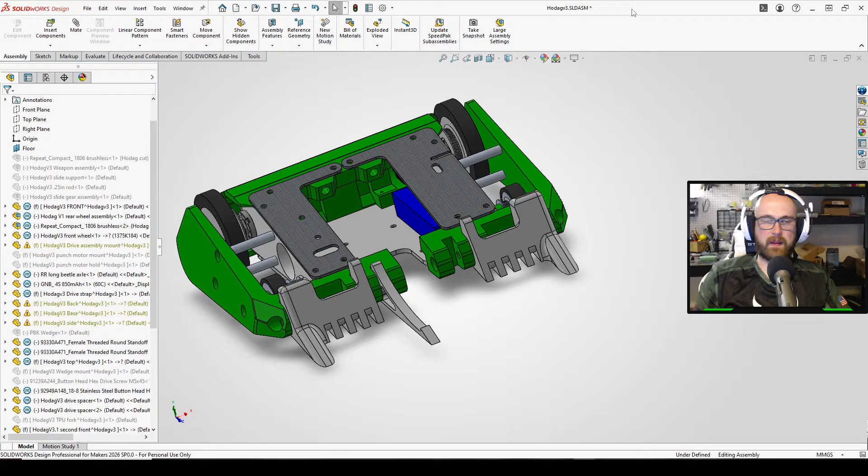But yeah, Jackalope, I have no plans on taking Jackalope anywhere. And I did update the description. I'm surprised you noticed that. That was pretty recent that I updated the description in my channel feed. That was like literally this week. Because...

Things have been a lot slower recently, because I got my robots ready like weeks before. Hodag, I got most of Bigfoot ready like a month ago, and then I got Hodag ready over Christmas.

Originally, basically what I was going to do—if you notice this was already open—my plan is to basically turn Hodag into a regular vert and have a version of that. Originally, I was thinking it was going to be a completely separate robot, but I'm realizing that with what I have planned, the odds are it's going to be a brand new robot.

And I have mixed feelings about that fact because I know everybody loves Hodag the way it is, and so the thing is, we'll have to see how much weight difference. I'll literally end up having to weigh it basically to see where we're at.

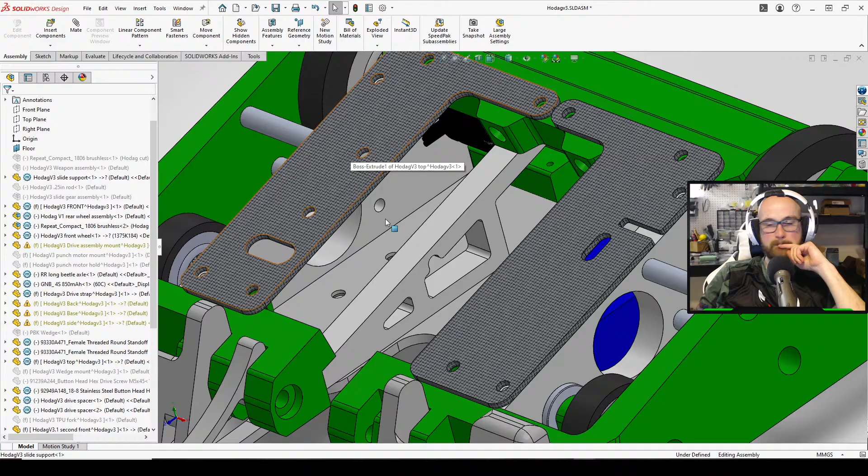Actually, now I'm thinking about it, the slide support was actually... I think I might configure the slide support as opposed to suppressing it. I think I'm gonna configure it because I realized otherwise I'm sort of undoing a bunch of work.

So for those tuning in, what we're doing is we're basically making a configuration—or I'm not sure if it'll end up being a configuration or a new robot. That's going to depend entirely on how much weight is in the weapon assembly. But basically, we're making a regular one. Is that what Razor Leaf is?

I was like, I don't know if this is the same as what Razor Leaf is. I realized this was meant for a much smaller motor, but we can make it work. We can make this fit. I went with this motor because it'll be supported on both sides, and it felt like the right choice.

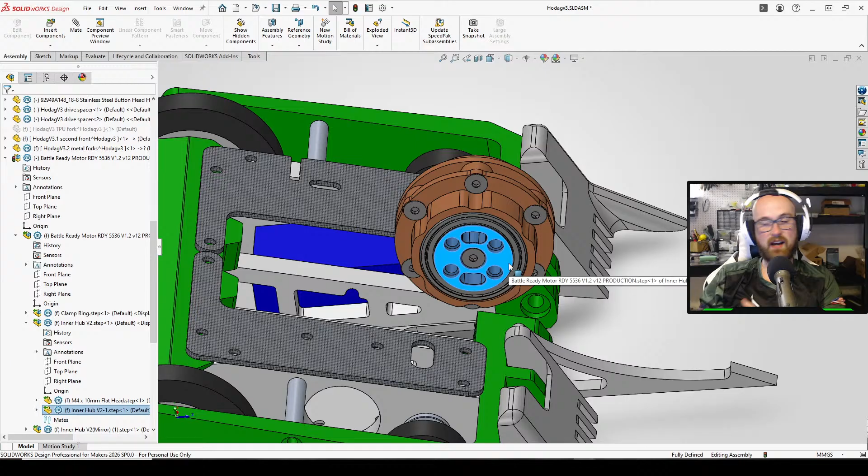I think what I want to do is what we're going to actually do—sorry, I'm thinking to myself as I go. I think we're going to start out by inserting a... so we're going to create a new part and...

We're going to make a virtual disk starting out. That way I know how big it has to be and how big the weapon's gonna end up being.

So we'll call this alt Hodag. We'll call it 3.5, I think that makes sense—I don't know. And then for that we're going to create a subassembly.

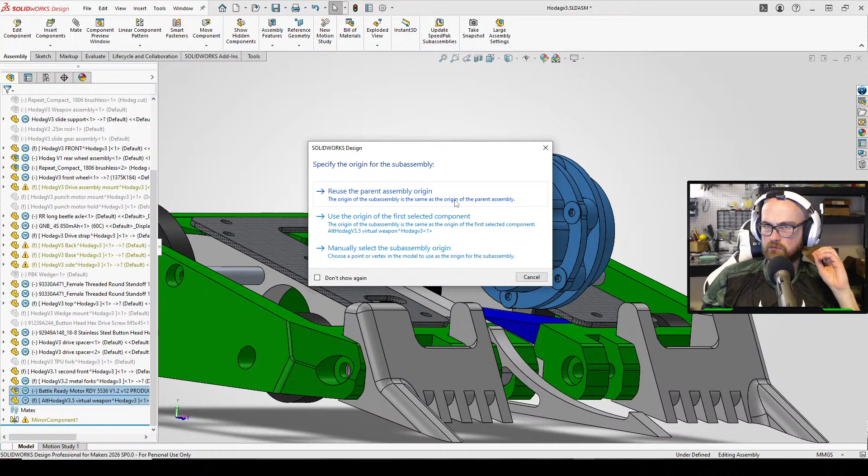Okay, so we're gonna end up editing this part. Actually, we're gonna open the subassembly, I think that might be an easier way to do it. And then we're gonna edit that part.

Basically, this is to give us a—oh yeah, I have to create a sketch plane. We're gonna do pretty much bog standard, as recommended, thickness. I'm gonna start out at—oh, we're gonna start at 4 inches. I don't know why this is millimeters, I'm gonna put this in inches. This feels right for this.

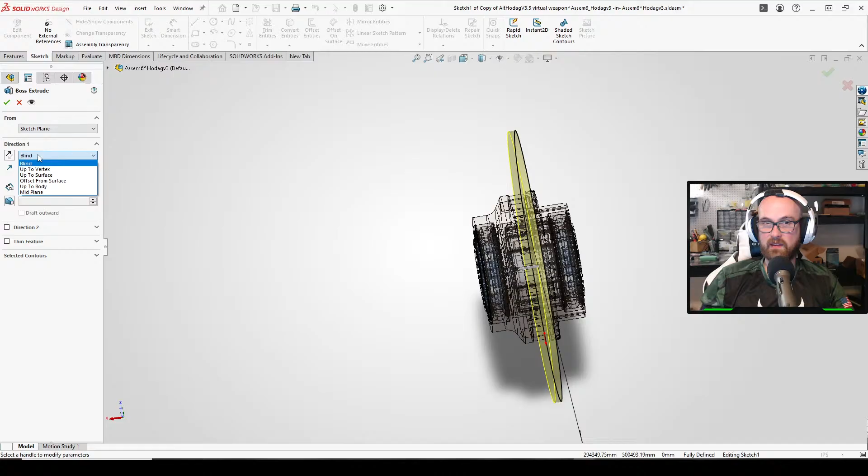Since this is—what do you think is the right name? Because I already had something in mind if it ends up being a new robot. Skunk Ape? I mean, yeah, it is basically the same as—this is basically what I did with Skunk Ape. That is not lost on me. I knew going into this that this was basically doing the same thing. And I mean, it wasn't a terrible idea when I did it then.

Okay, so that's red. This is simulating a 4-inch blade, which is half an inch larger in diameter than current Hodag. And we want to keep this as low to the ground as possible, basically. I don't think we want any of the motor extending past the front of the robot.

I think that's part of what we want to do. We want to keep this—I think we want to keep the center shaft above the plastic part here.

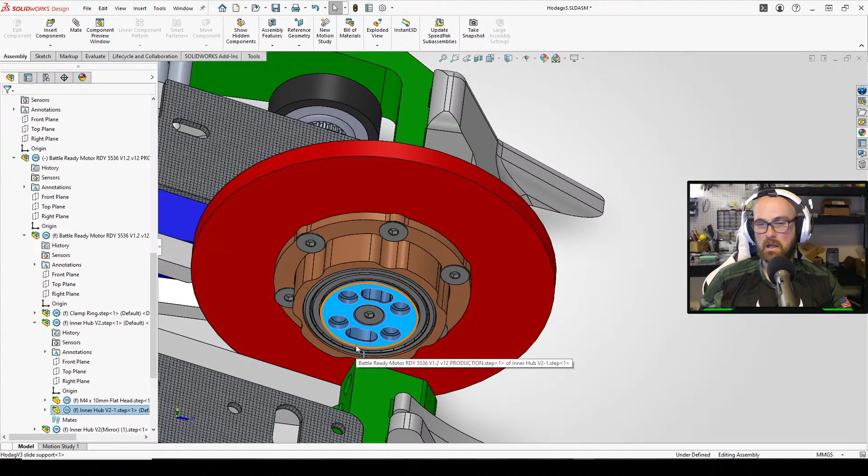While we're at it, what I want to do is configure this. So what we're going to do is create a configure, add a derived configuration. I thought about doing a part from scratch, but I decided on a configuration at the 11th hour, pretty much.

And then what I've got to make sure to do, in this configuration, is suppress this one, because it's mirroring a part, and I'm going to have to mirror the part in the part because it's going to actually have to create a different part. That's why I didn't—because that one is symmetrical, but as you can see, this is not going to be able to just be a flat piece of UHMW. That's not an option.

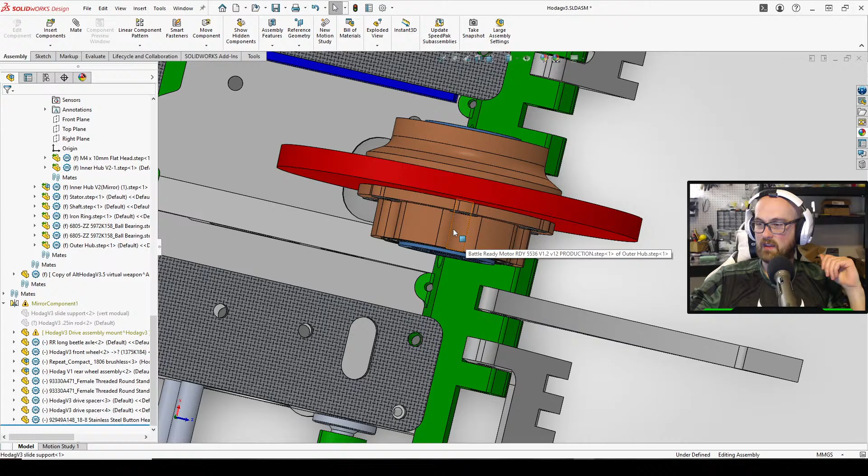Sorry, I'm thinking to myself how I want to do this. I think we're going to create a sketch and create something that puts the axle, I guess we'll call it, where we want it, in the correct position, and then we're going to work from there. Then we're going to finagle things, because I think what I want to do, actually, first off—

I want to do some mates. I want to mate this so it's a little bit closer to where we want it. But we're going to start out with a—wait, width or symmetric? I think I want symmetric. We'll do it the right plane, and then we'll do the sides of this.

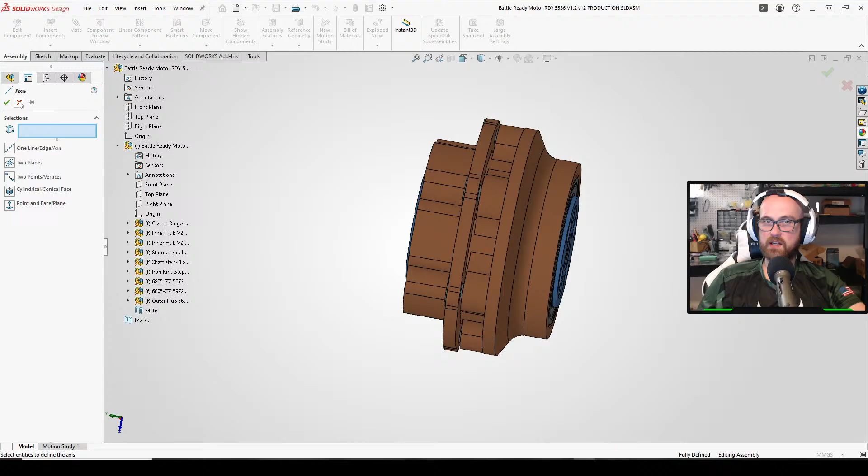Actually, did Seth do this correctly in a way? Or I don't even know if that necessarily matters what Seth did. Nope, it is not—there's not a plane where I want there to be a plane. Actually, we'll create a plane. We're gonna create a reference geometry in this file, since it didn't carry over, even if Seth did one originally. That way, we have a plane that is the center of mass of the weapon.

Because that's better—it's better to do that than the symmetric mate. I'm trying to find rename tree item. There we go.

Oh no, I don't know if that's a good or a bad thing, that this is the motivation for something else.

We're going to do that, and we're going to do this to the right plane of the assembly. Part of me wants to—no, I don't want to. I think I want to avoid having our little assembly centered or dependent on this.

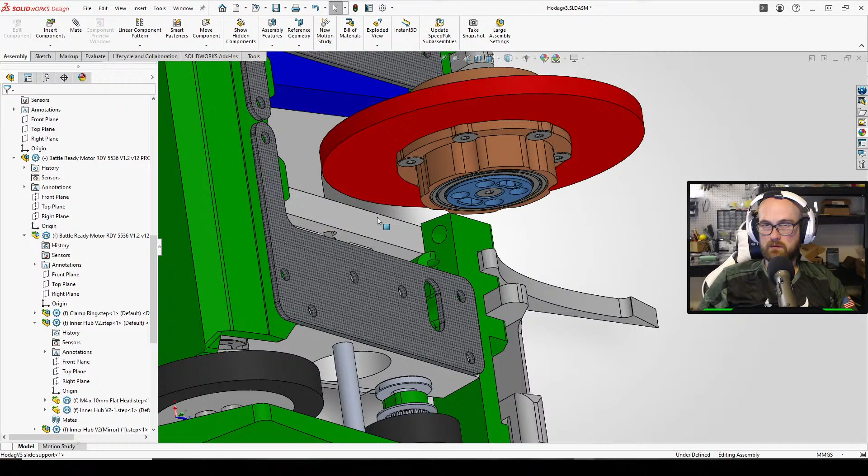Okay, so what we're going to do is edit this, and we're going to basically create a sketch off of it. And I'm going to extrude it out, and then I'm going to cut away what I need to make the weapon fit.

I'm definitely going to end up changing where the holes are, because we're basically going to end up doing something like this. I want this perpendicular to that. Actually, what we're going to do is we're going to do...

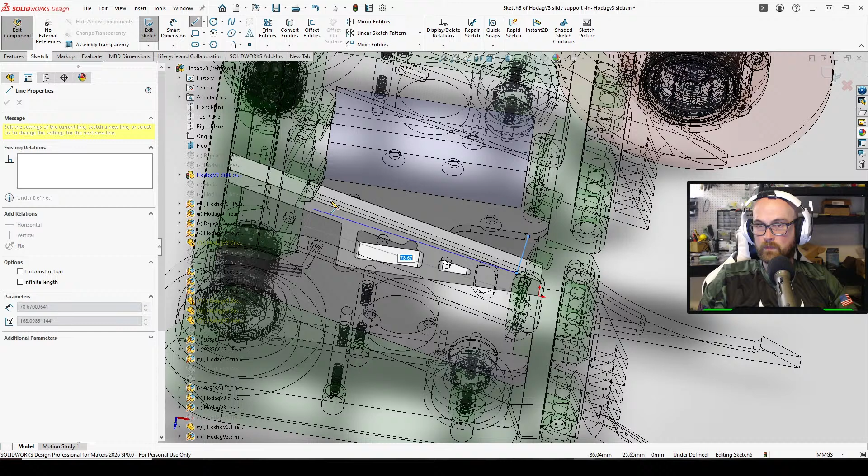I'm actually probably going to end up filling in these holes and creating new ones. Or I'll have it be 3D printed and won't care—one of those two. Because what we're going to do is make sure this is perpendicular to that.

Because this part is basically going to give us—we're going to give them a 1 millimeter gap. I don't think the gap matters. Basically, it's probably going to end up being the height. We're trying to make this the height.

I may end up doing a top, basically somewhere to have it be where the top plate is. I mean, this version of Hodag's already inspired by Pipeline Punch pretty closely.

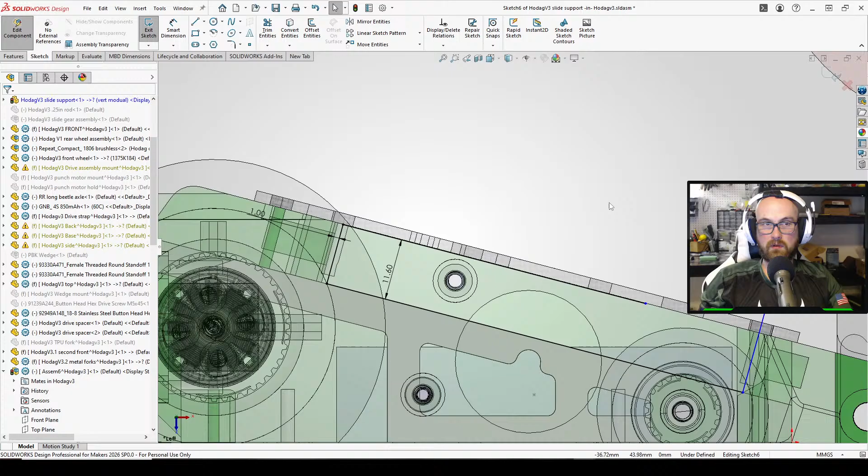Yeah, this is definitely going to be a smaller weapon than Pipeline Punch. It's always going to be a small weapon because Hodag already naturally has a smaller weapon. So there's only going to be so much room, even though this will be a larger weapon. Otherwise, I feel like if it's not a larger weapon, it kind of defeats the purpose. But I think, yeah.

What's funny is even though I'm buying like a $95 hub motor, this is still going to be cheaper than the current version of Hodag. I can guarantee you that. Okay.

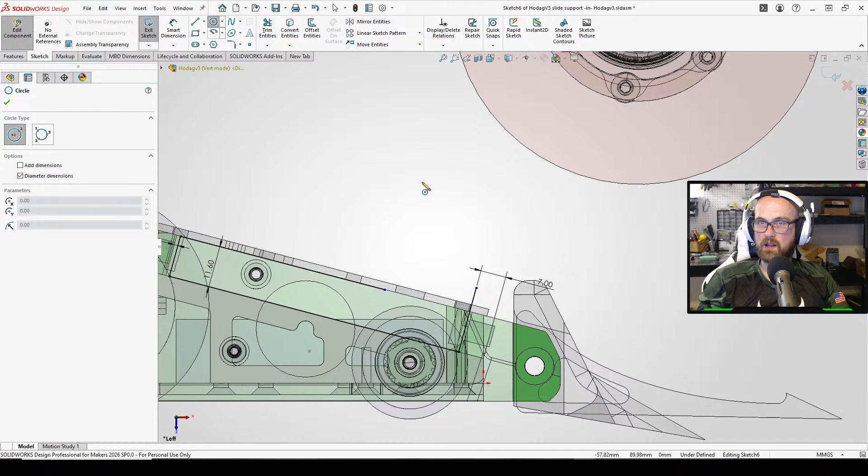So, how do I want to do this? I pretty much want this to be something like that. I'm gonna create a hole, even though I don't think I need a hole there because there's not really a through shaft. I'm gonna be mounting it through this with the screws. I think we're gonna have like a 5mm hole somewhere. The idea being this is where the center of the weapon's gonna be, and I'm gonna use this to mate.

This, please tell me I actually made that... no, it's not gonna be, that's not perpendicular. What are you doing? That's not what I did.

Here we go. Sometimes when I use the mouse shortcuts, when I right click it brings that wheel up. Whenever I hold right click, I can move the mouse to quick select things. I didn't know that—they didn't teach me that in college, I had to learn it after the fact. So that's a little tip for you. I don't think I ever really talked about that, even though I constantly use it.

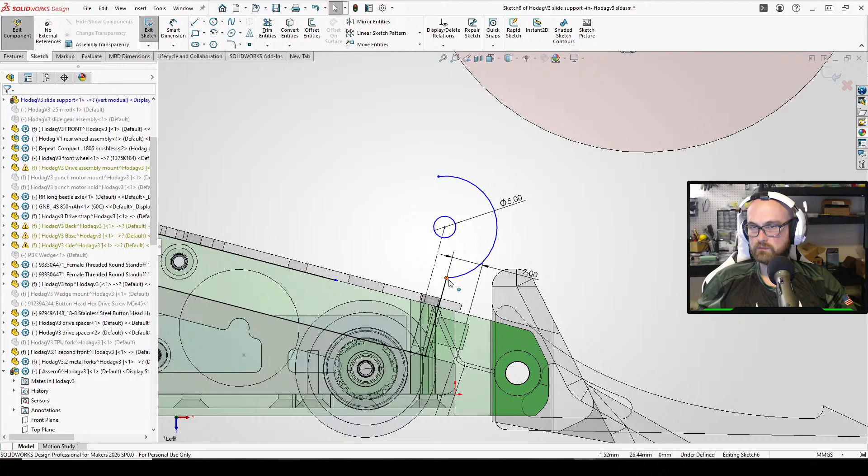I think I'm gonna make this slightly higher than... oh, control, nope, I don't know what I did but I didn't want to do it. We're gonna do that slightly higher than the front.

So let me double check something. I think I want what it's mounting to be just the size of, I think this. That's not what I'm trying to make, right? That's 20, I think, so we're probably gonna do like 27, 28mm.

Actually, we might want to go closer out to the bearing, or closer to the edge of the bearing. So we'll go 30. We'll do a clean 30. Or maybe a dirty 30, however you want to say it, I guess. I don't know what that...

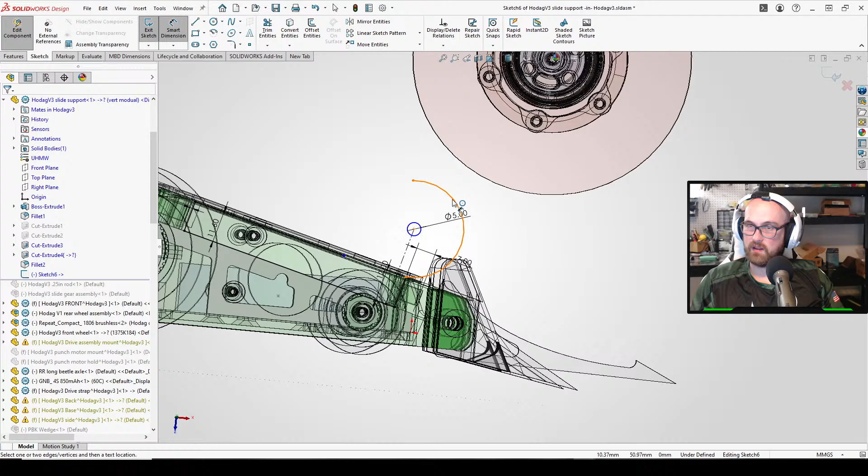It's weird, it looked like I was editing it, but I was not. That means this is going to be 15. That is... ooh, that is not—I was like, wait a minute, that is not how this is going down. This is not going to be the shape of it.

Sorry, I'm thinking. Is... you know, just for shits and giggles. Okay, so one thing we're gonna do, sorry, bit of this, bit of that. Stop trying to—I'm not trying to do that.

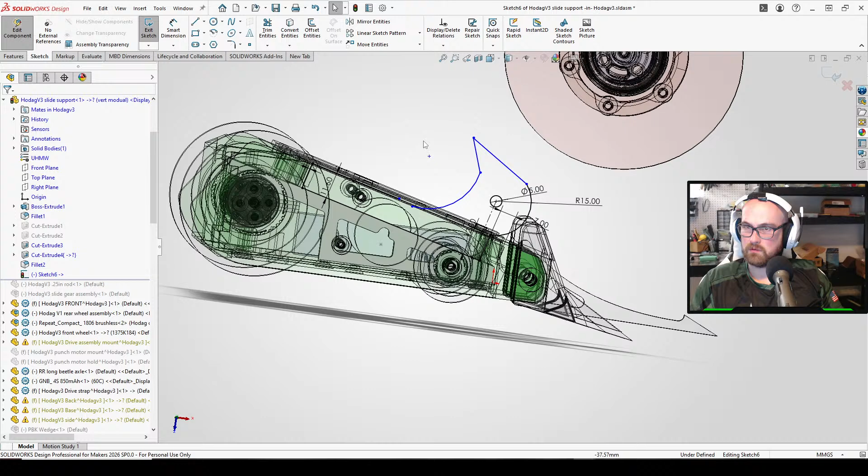And we're gonna mate this to that. Oh, I don't think I mated it to the wrong thing. We're just trying to get some rough sketches currently. This is basically—I still want it to kind of look like Hodag, but also this is gonna be what's gonna keep our weapon from touching the ground when we're inverted.

It's not gonna—I don't, maybe it'll be that. But I obviously am gonna constrain that later, hopefully. Wait, did I not? Am I missing something? Oh, I'm not—oh yeah, I am trying to do up to. Do I not have any con—

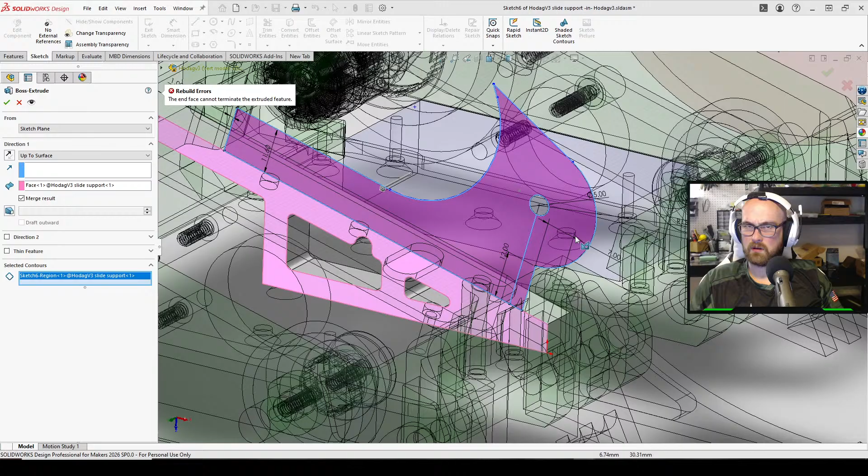Sorry, I needed to select the contour. It's not like I created... wait, I did the wrong surface. Surfaces. Whoops. Up to surface. Sorry, there we go, that should fix it. That looks goofy as hell, but—

Then basically what I want to do is I want to have this. I had a feeling that was going to be too low because, of course it was. Also, we're touching the ground, which is a bit of a problem. Yeah, there's a lot of issues right now. I just needed to get that first little version out.

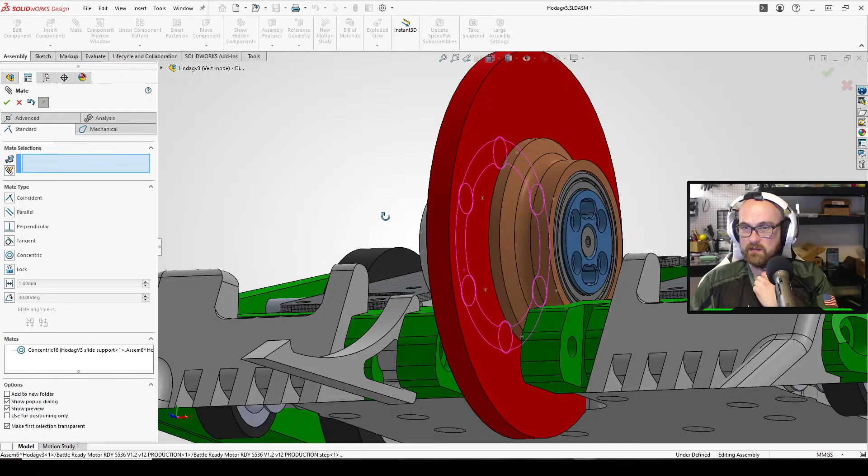Also, the motor is inside, so we need to go just—I think I'm going to go just high enough that the motor is not inside the robot. I think that's how we're going to do it. And the moment that that's not inside the robot, we'll go. Doing robot CAD's a good idea.

Okay, so I wanted to know what our constraints were, that was the goal of that. We need to figure out what our limits are so we can break them. I think actually how I'm going to do this—one, we're going to do that. We're going to do, how about that, 32?

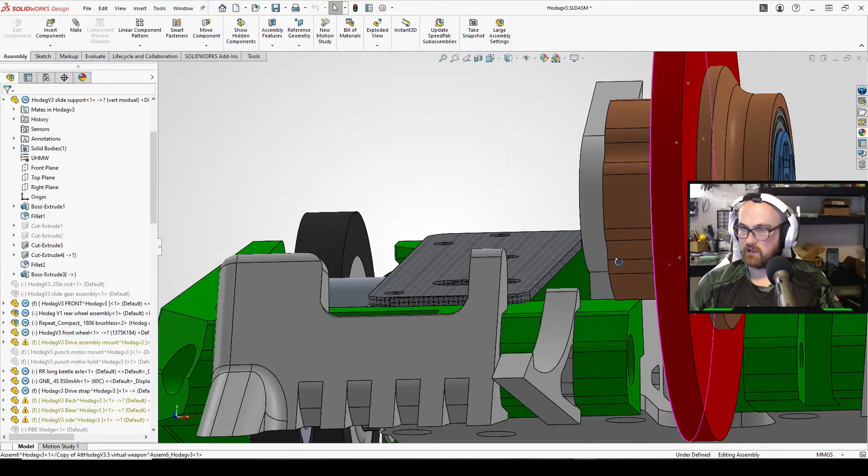A lot higher up than it looks. Oh, it's not actually high up, because we're still inside the robot. Are we like dragging on the ground still? We are still on the ground, but we have to go higher anyway.

Okay, I didn't realize how big 4 millimeters was. Sorry, I spaced out for a second there. I think 36 is going to be where we want to go. Yeah, obviously we're going to have to change some dimensions, but... 36? That almost seems too high.

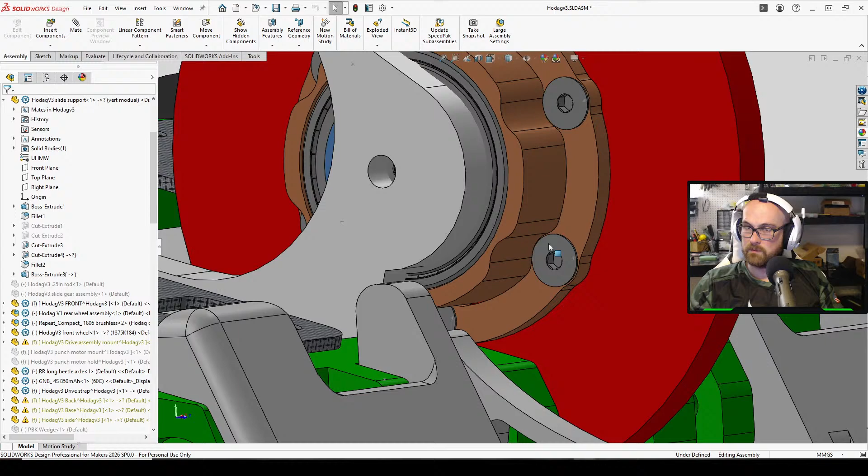I think we can go a little bit lower. 34 maybe? But yeah, I think 4 millimeters was the size we're going with.

Rep. Okay, so we are currently not touching the ground, which is good.

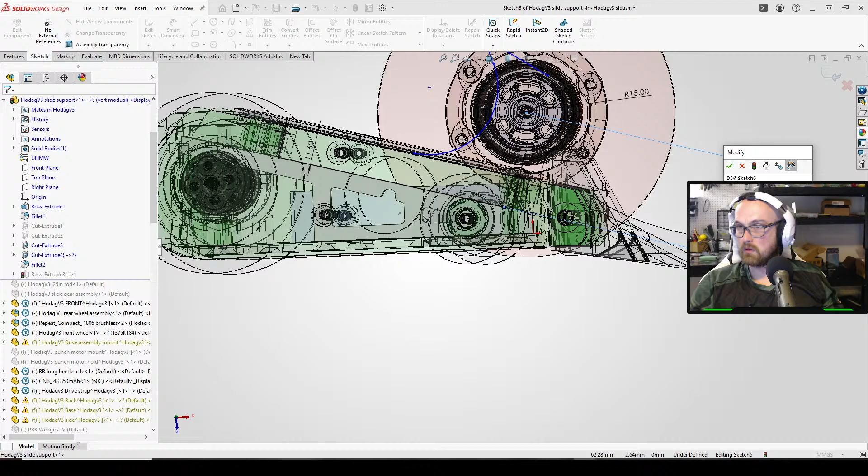Because what is the... Yeah, we're about 2 millimeters above the bottom of the wheels, so maybe we do want to go a little bit higher. Give us an extra millimeter. Okay, that should be good. Now we can worry about other stuff.

That we're going to 54 seems kind of off, because we're gonna probably end up rounding it off, so we're gonna do 55.

And then okay, what am I thinking? How am I gonna constrain this? Is what I'm thinking. I think we're gonna do an angle. That end up looking...

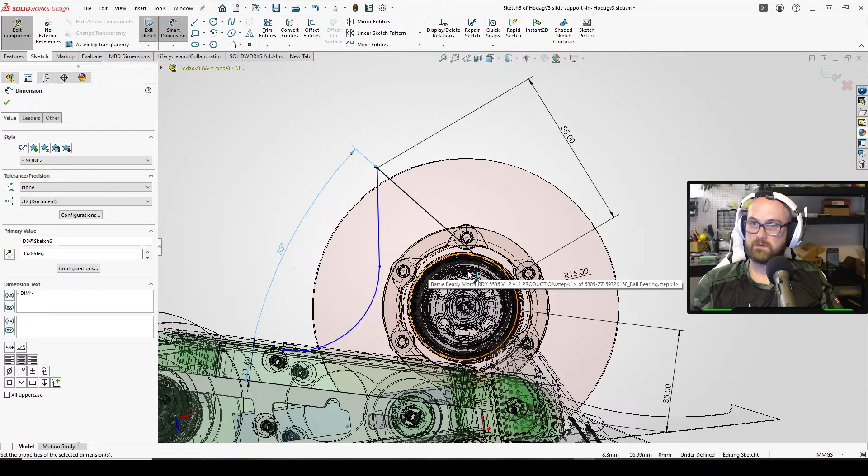Okay, and then I'm trying to think of how we end up constraining that. Nope, I'm not trying. You think I'm trying to do SolidWorks, but that's not what I'm trying to do. Oops, I didn't want to do it that way, even though it's not a terrible way to do it.

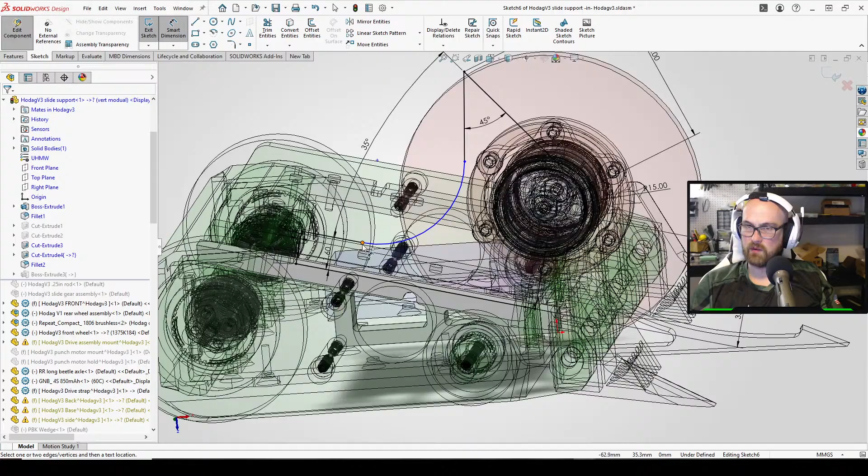What we're gonna do is we're gonna have this. What angle do we want this to be? 45 seems fine. And then I think we want to do it by constraining this, by making that a certain size.

Because I think the goal is that we basically don't see any motor in the profile.

Okay, for now, before we mess with anything else, how does it look? I don't think we're going to have to worry about the weapon touching the ground. And the motor is barely extending outside the front of the robot. So we're not going to... I do plan on having armor there, but it's going to be separate from the mount itself.

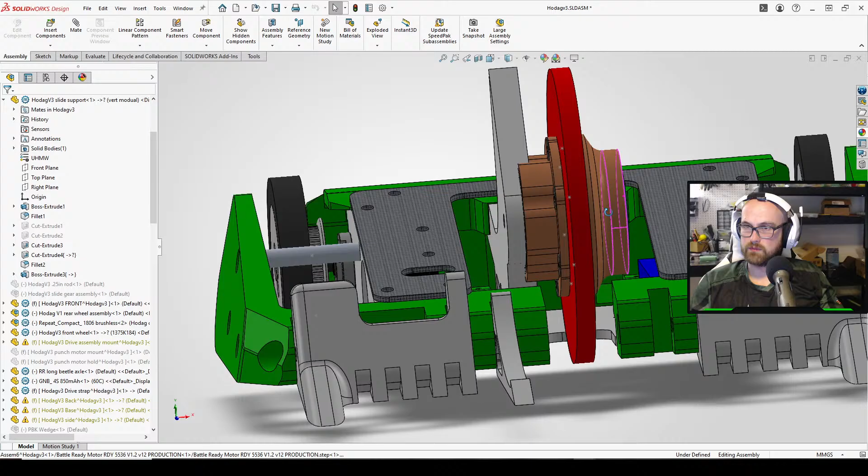Actually, well, sorry. I'm deciding that what I want to do is also fill in this hole since I'm probably going to replace this with a printed part. Or if I do a UHMW part, that I'm going to make new holes. So I'm going to fill in those holes.

So we're just going to convert all these entities. We're basically going to undo the other. Nope, that's not what I want to do. I mean, I guess we could do it that way. It's not exactly elegant, but I think it would actually work if I just did that whole face.

Actually, no, it wouldn't. That's not actually what I want to do. Because I realize there's holes that I don't want to fill in. We'll just do it this way.

Basically, yeah, that way we have a different way to control the size of that. Oh yeah, I have to change the thing to actually select contours.

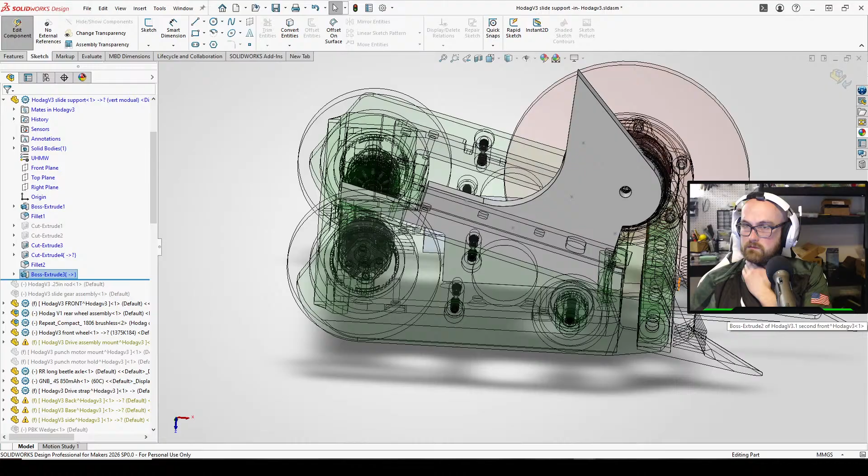Okay, so what's our hole pattern? Whatever. Shut up. Shut up.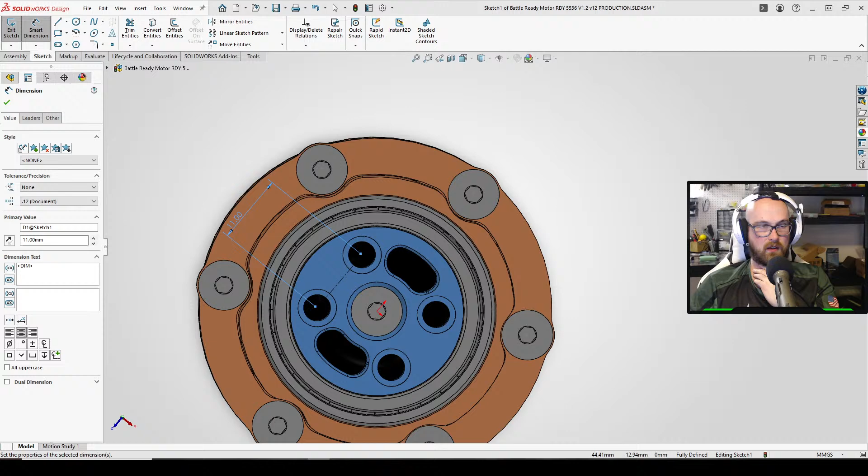Because this is a weird hole pattern. Yeah, I think yeah, because anything else doesn't make any sense. So we got 11. Eleven by 15, it looks like, is the hole pattern we're working with.

Oops, sorry, I did not mean to hit the microphone with the pen. Okay, so that's what we're doing. That's what we're working with.

Get out of the way. And then we're gonna add those holes. We're actually gonna just do it to the sketch we're already working with. No, actually, we're gonna add new holes because that's kind of pissing me off.

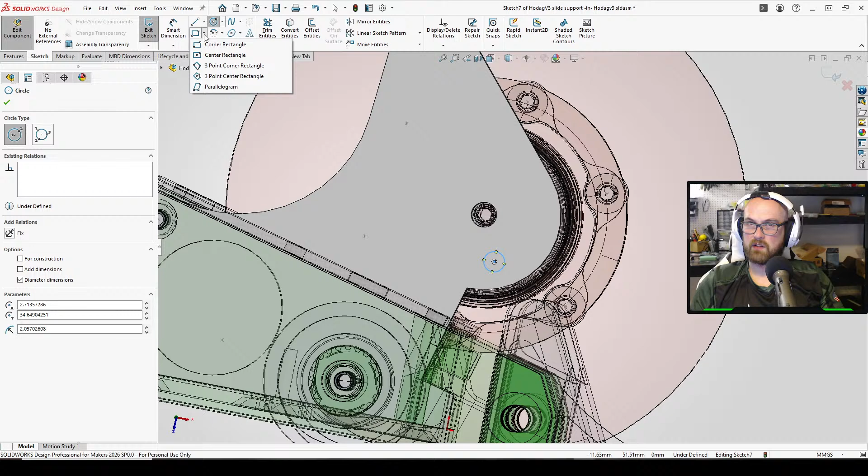Actually, here's what we're gonna do. We're gonna actually do... We're gonna make this for construction. Go that way. We have. Do 11, I guess.

Actually, I'm not gonna make these not vertical or horizontal or any of that. We're gonna rotate these a bit.

Okay, we want to... okay, we do still want them to be perpendicular. Okay, I was like, I at least want it a square still. I just don't need it to be.

Okay, and then we're gonna make these equal, and they are 5 millimeters. So we're gonna use 5 millimeter screws. We're gonna do 4 there, and then we're gonna do whatever creates the most room for us.

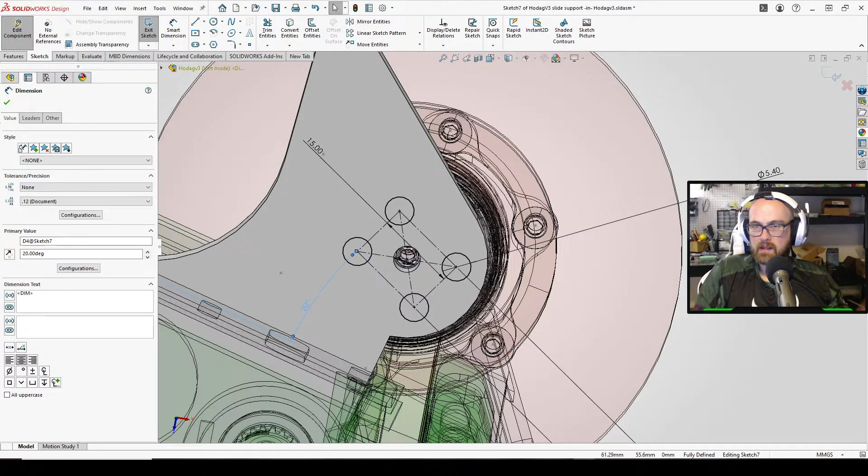I am gonna end up needing a... I'm gonna probably put an aluminum plate right underneath it.

Actually, while I'm in the sketch, I'm going to create a hole that is a certain distance from this. That way, we have something that we can use as a guide for the pin.

Hodag at home. I guess you could call this Hodag at home.

I don't know why I did that. I meant to do 1/4 inch.

I want to do that, and then because I want, we're gonna make me a center line. Put that there. Make it coincident. Is that not working the way I think it will? Oh, I guess.

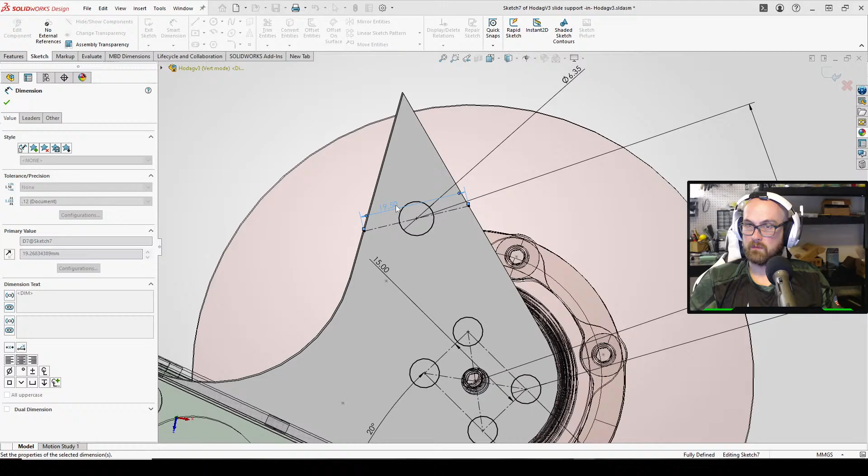I was trying to think, do I have control over the length of this? I didn't feel like trying to find the minimum function. Wait, is there a... I'll worry about that later.

Okay, so that creates holes for our mounting and for that. With that, we're going to cut through all, and then we want to make room for our weapon motor.

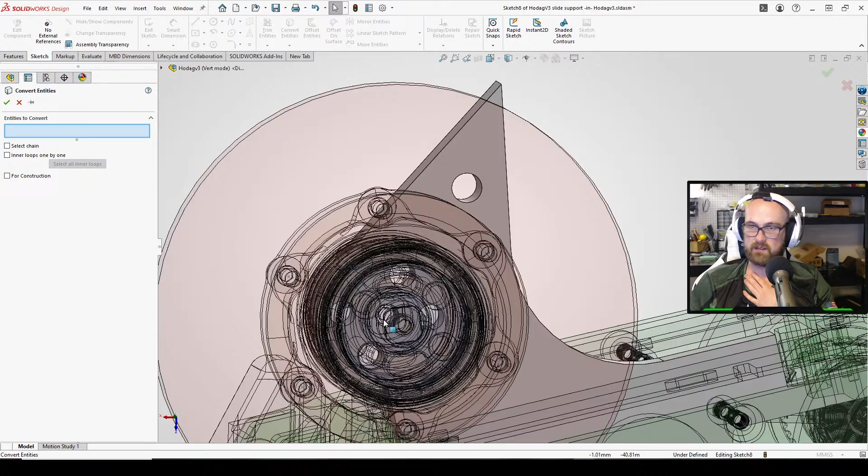The thing is, I feel like if somebody was trying to create Hodag, they would not probably make it just a regular vert. Actually, before I do the cut - sorry, I did not mean to burp in your ear - I want to do some sort of chamfer here.

Actually, I want to make it bigger, because we basically want this chamfer to go all the way down, all the way up. What the hell? Oh, I think we're getting so big that it's... okay.

How's that look? That makes it look a little bit sturdier.

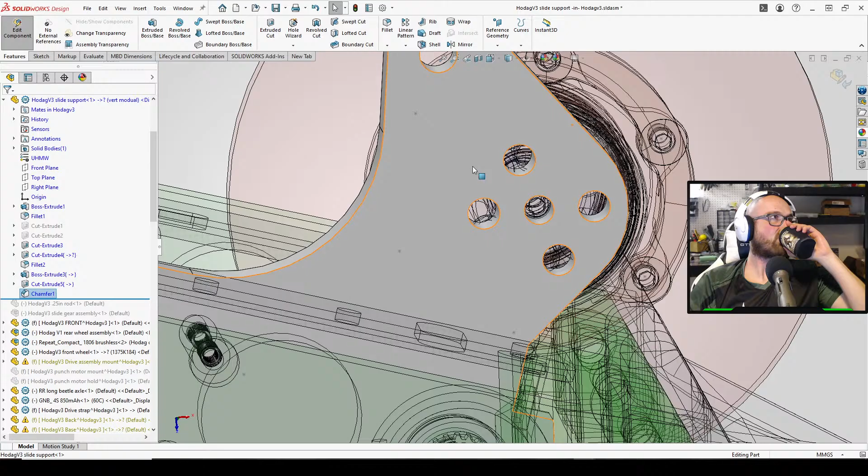Okay, now we want to cut, and from here convert. And then I think we're going to say fuck it, and we're going to do an arc. Arc from here. Whoop, oh my god, I hate it when it wants to make an arc from the opposite direction.

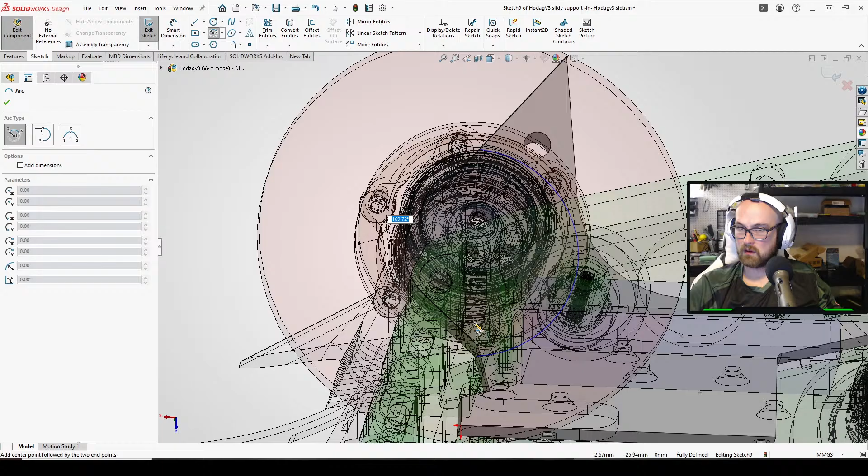Oh, we definitely want to save. Yeah, save. Sorry, we haven't saved in a while and I wanted to save.

Oh, okay, we want to go a little bit further than that motor - 23, since we're really close. Yeah, that should give it some breathing room.

Then we can do some trimming from there. We got a trim. Oh yes. Oh my god, perfect.

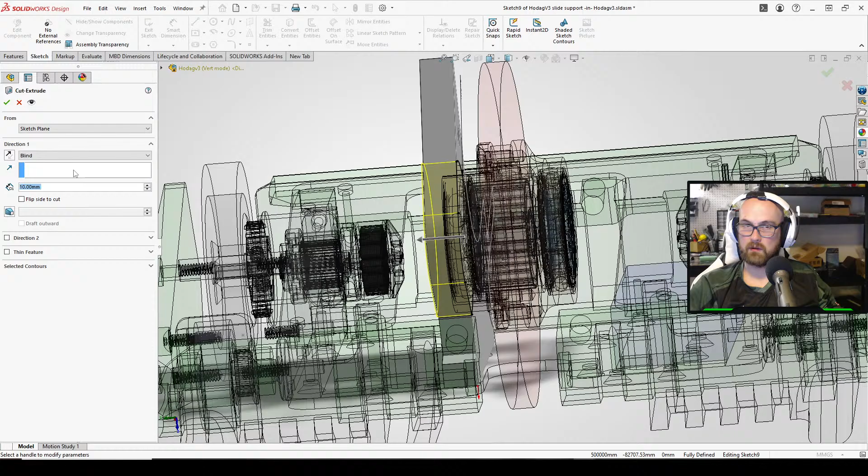I think my math said 4.5. Is that correct? It's pretty goddamn close. I don't think there's something I didn't account for. I might not have accounted for everything. Actually, no, wait.

No, the actual motor itself, the inside of it - I was trying to, I have to see if there's like actual... Oh yeah, I didn't quite - not quite.

Because I think I made my estimate based off of nominal sizes, and I did not allow for that. Yeah, that'll be close - that's much closer at least. Gets pulled in a little bit. Balancing should sort it out, you know.

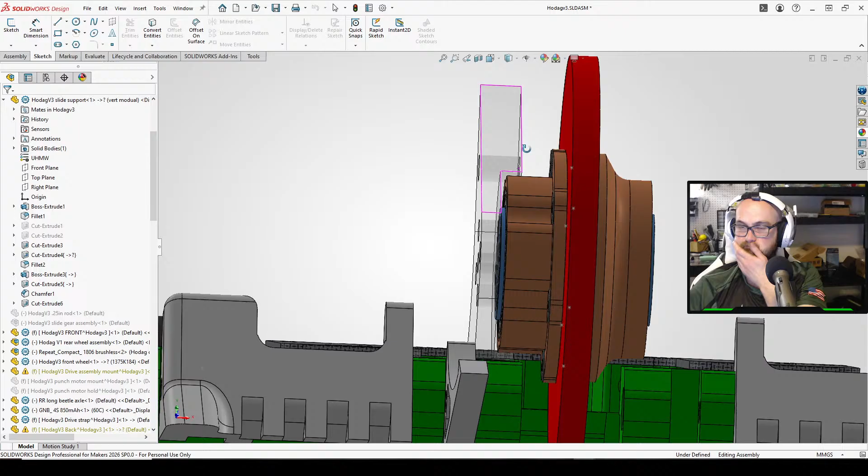I'm debating if this needs more space. That feels entirely too tight. Said no one ever.

4. Is that gonna break it? Kinda.

Damn it. Because what I'm trying to do is make it go all the way to the edge, because otherwise we're going to have a weird little nub. I don't want a weird little nub.

I have to trim this. It's going to get angry with me. We go to this. Come on, stop playing with my heart.

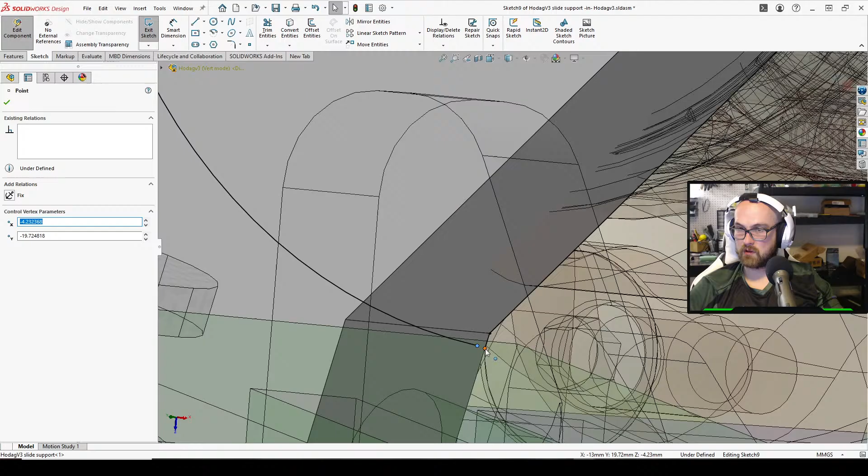Oh, that - there, that way we do that. That way we don't get some goofiness.

I think an extra millimeter of clearance will prevent it from flexing into itself. Although I probably will add fillets - oh, we'll do fillets last. Wait till the end to do fillets. Don't want to get ahead of myself.

Although actually I think I'm done with that part. I was like, does it match up? Okay, it matches up. Just got to do a discount double check.

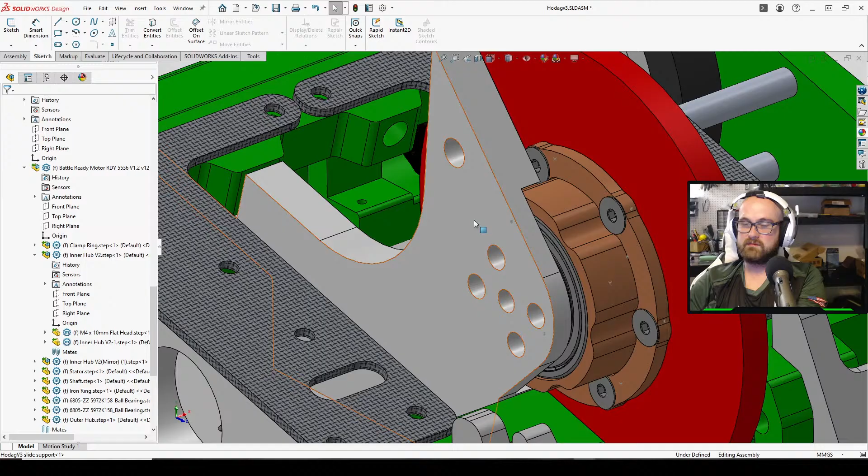Do I modify the top plates? That's the question - do I create new top plates? Because if I want to run it as Hodag, we want to avoid changing the top plates. If we don't want to run it as Hodag, we definitely want to change the top, because I think we want to mount this assembly in the middle to the rest of the robot through the top.

I'm double checking that I like this weapon size, cause that weapon size is big. 4 inches is enough in this case. I don't know about every case if 4 inches is enough - I can't vouch for it in every situation.

We can definitely go bigger on this part because I think we want a little bit more material there, even though it's not going to be what's...

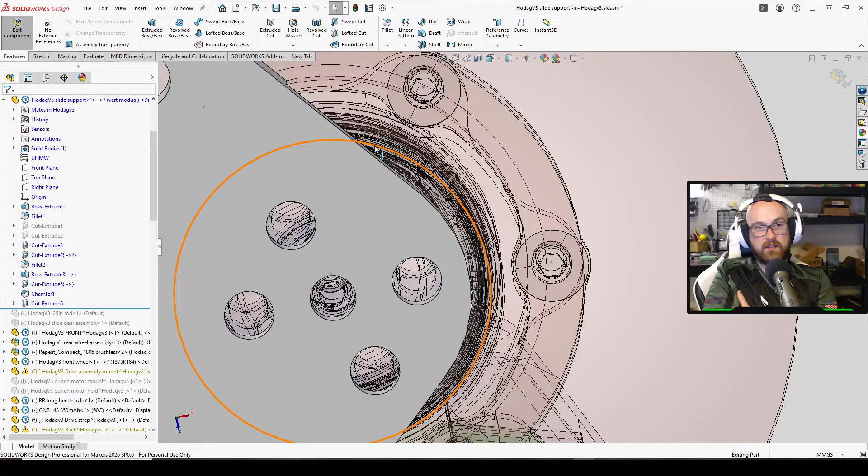15-kilogram 4-wheel drive - I don't know much about robots once you get to 15 kilograms. I am not the person to ask. The biggest robot I've made is a 3-pound robot, so maybe someday I'll make one, but...

Oh, that actually moved over. That should be fun. But yeah, I don't have any recommendations for drive motors - not something I've looked into.

Because I'm trying to think, I don't even talk to that many people that build 30s, since we don't really have many here in the Midwest, or we don't really have events. I know people in the Midwest have stuff that'd be around 15 kilograms.

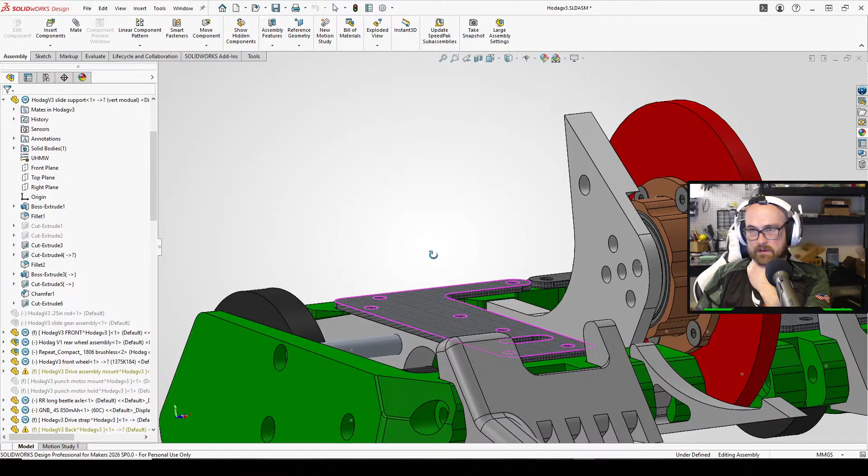Okay, what am I trying to do? Am I satisfied? Yeah, I know.

I don't know what Just Cuz does, but I know Repeat has stuff that's at least designed for 12-pound robots, but yeah, 15 kilos. Pretty much anything I would tell you would be a guess.

Yeah, I know the Magnums, they say they're for 12s and 30s. I can't vouch for what size they're good for. I just know that Repeat sells stuff that says it's for 12s and 30s, but I also haven't really looked into that type of motor.

We may need to make some adjustments.

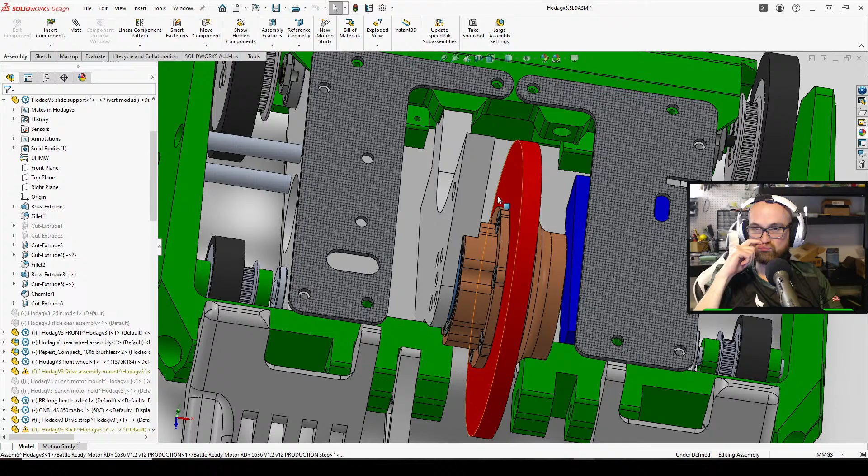And if I ever have to disassemble Hodag, I am definitely measuring the weapon assembly size.

It's far enough for... is there? I'm also looking if there's a way I can bring it further forward. No, I think if I bring that any further forward, we're gonna end up running into issues.

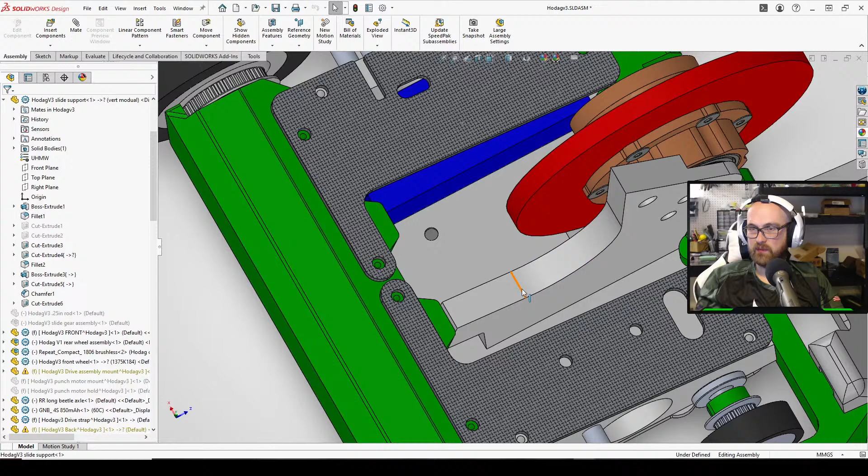I'm thinking it would be spicy if I just used the same top plates. Even though that would just create a hole, because I also feel like I would want to shore up the hole.

We want to create a hole on that plane. Okay, we actually want to have it along the center plane, make sure it's centered.

Do we just want to center it on this? I mean, it doesn't really matter where we put it. I'm just going to make it the same hole size as these ones, I guess.

I don't know, oh, that's not right. Yeah, because these are for M4 screws, so we're probably going to go 3.3 or something.

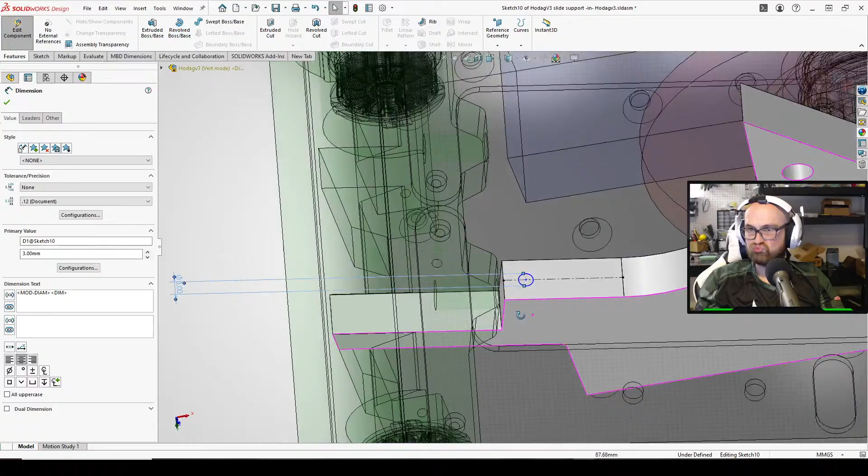50-55s. Vertical circle spinner, I actually haven't made that many vertical spinners. 50-55s, I mean, that definitely seems like enough motor from what I can tell.

That almost sounds like a lot of motor for a 3 pound or 2.5 kilogram. That'd be like, forgetting how big that is... that's about 5 pounds, that's like a weird one. I think that would... no, that sounds like the right amount for a 2.5 kilogram.

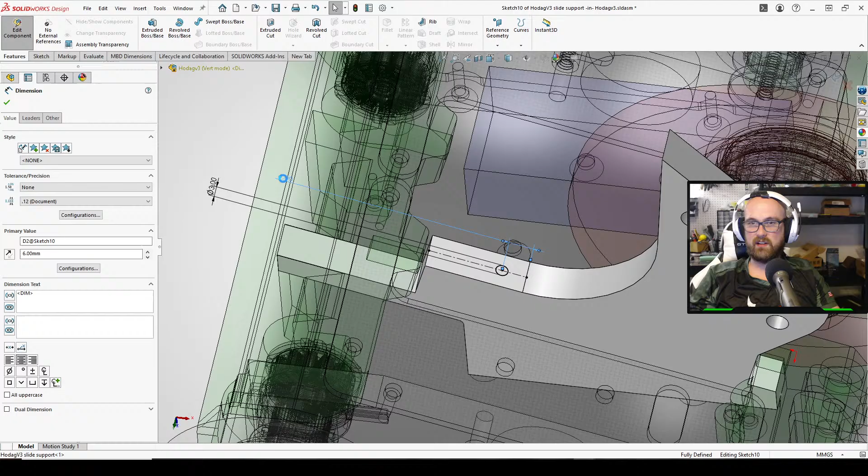Where are you guys running 2.5 kilogram? I guess I don't know what sizes they have outside the U.S. But yeah, because that's bigger than, that's almost like a mantis weight, because that's bigger than a beetle. That's interesting, I've never even seen an event or anything around that size.

Oh yeah, badass definitely has that type of motor.

What did you say, BLDC? BLDC. Yeah, because that seems like the correct size if we're talking bigger than a beetle weight.

And I'm guessing you're probably... yeah, because I also haven't even made that many vertical spinners, to be honest, and the ones I've made have not been exactly successful.

Okay, what am I gonna do? Like I was about to do, okay. Oh, I was gonna add some fillets, so this isn't... because I feel like if I don't, that's entirely too big.

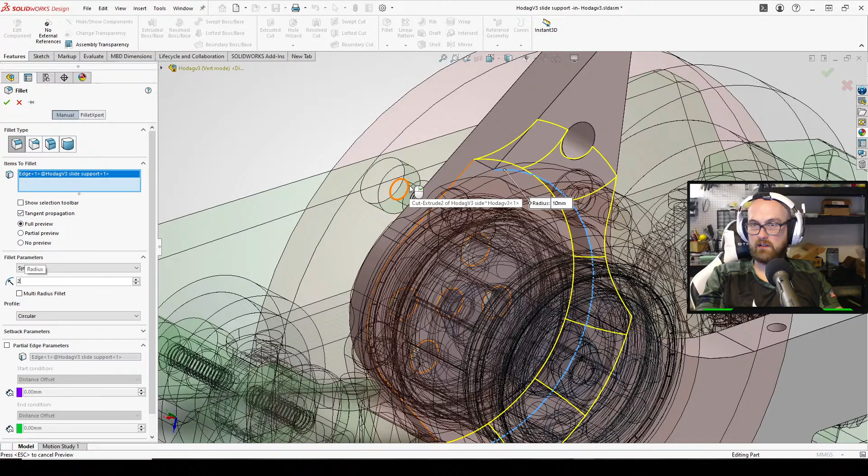Inside and out. Yeah, that should be correct, basically right up to where it's supposed to be. Starts that way. Also, that should make it so it's easier to fit inside of there too, not gonna get stuck on the edges.

Oh, that is not okay, I'm actually gonna need to make that a little bit bigger. Oh, not that one, we went too far, too far in the sketch. Nope, not the feature.

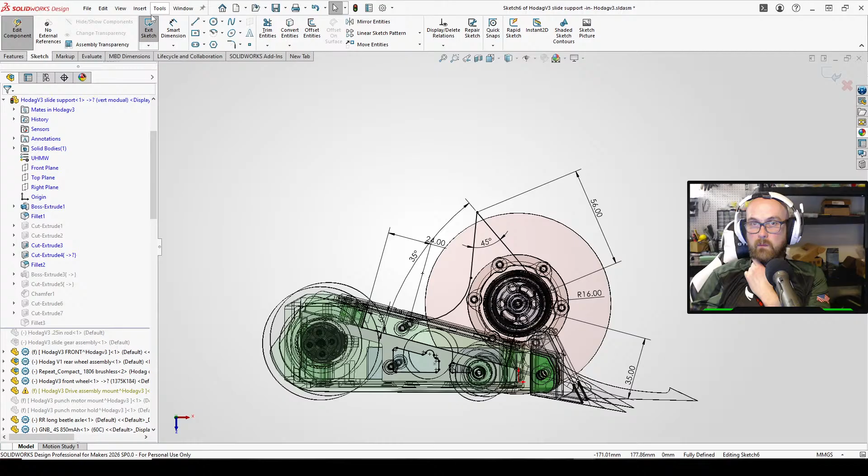Oh yeah, that's definitely not gonna work. So we're gonna change that.

Yeah, but we'll get back to that. I want to finish what I'm doing before I fix the error, because if I don't fix it, it'll come back. Odds are it won't go away.

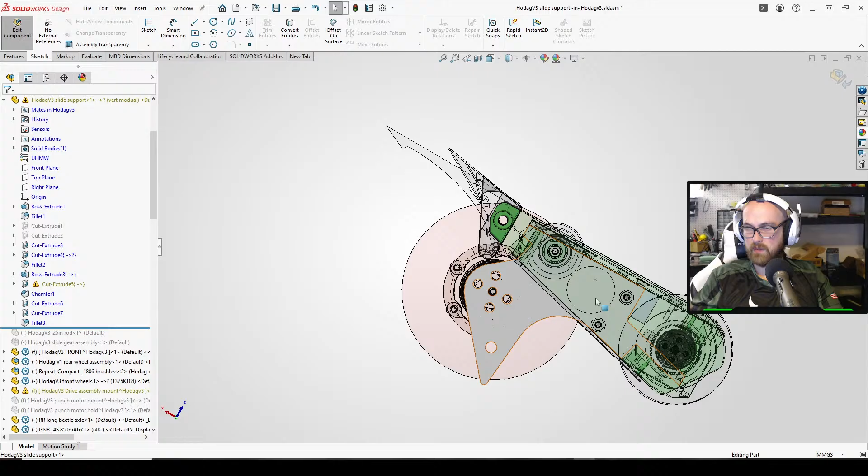Is that the right angle? I'm realizing that's not even gonna work, I think. No, still barely works. Yeah, I think the ear might need to be a little bit higher actually, because currently...

I mean, if I create, I guess I could create a plane. Planes exist.

Yeah, that'll be fine, I think. At that point, I'm more worried about if that's going to be enough material, or if it's just going to end up quickly getting smushed and get stuck upside down. I guess it just won't be able to spin upside down.

Okay, what's your- oh my God, you hate me. What? Okay, now you're just lying to me. You're just making shit up. SolidWorks, why are you making stuff up?

Oh, it's because that dimension broke everything. Okay.

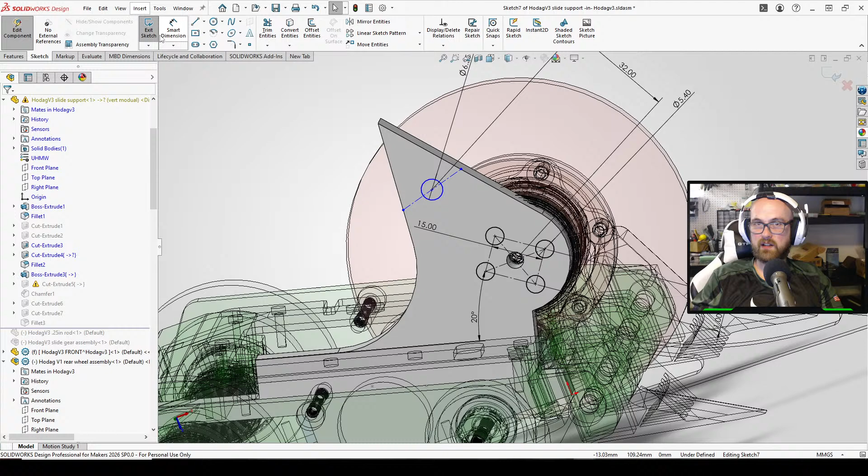We're not even gonna constrain that because- actually, wait a minute, I know what to do. I know what I meant to do. I know what'll do it. Sorry, I thought if I do this, this, make this for construction, make this line. Actually, there's an easier way I could have done it. I could have done a line straight to it, made it perpendicular, whatever. Good enough.

Mission accomplished.

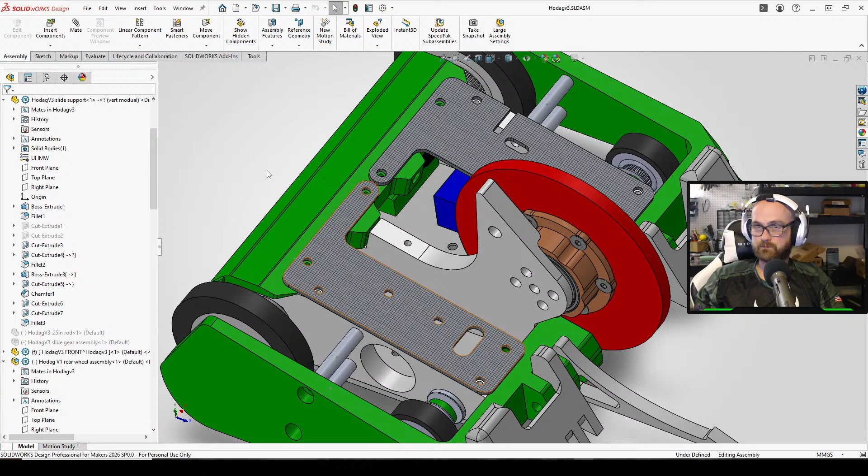Okay, we're gonna add a- we're gonna call this Alt Hodag. Alt Hodag 3.5, and this will be the weapon armor.

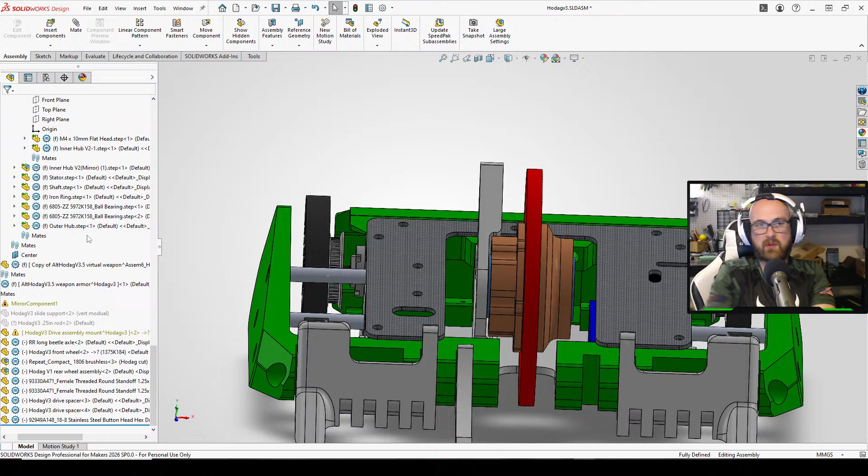Basically, I'm gonna create a TPU shroud. What type of weapon is it? Oh, you're asking him? Yeah, that is probably kind of important. Like if it's a drum, I guess- I think he said disc. Circles, yeah. Diameter will matter, because some motors do not even get you the kV that's good for your diameter.

I also don't even know what sort of battery you would use in like a 2.5 kilogram. But okay, what was I doing? Oh yeah, we're gonna design some armor.

So I think we're gonna borrow some holes from our dear old weapon assembly. I think we're actually just literally gonna convert entity. So I think we're literally gonna mount- we're gonna pancake it. It's gonna be the part holding it up and connecting it to the robot, the armor, and then there's gonna be a little plate.

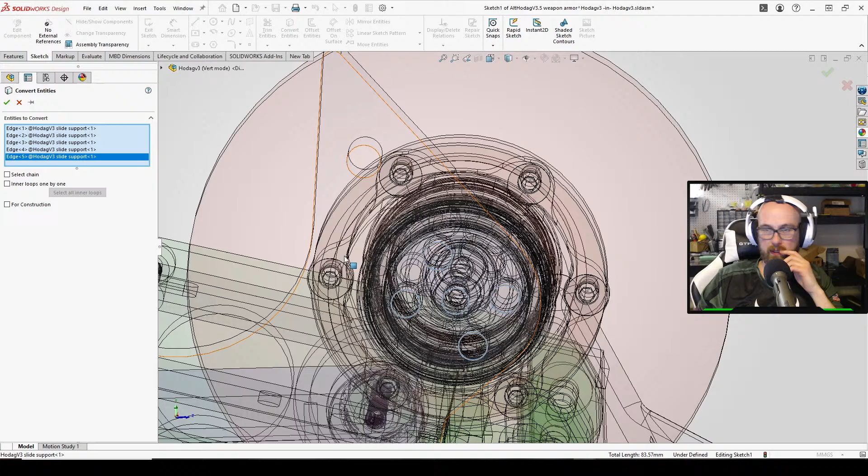I may end up creating more holes, but we'll see what I end up doing then. There's like so many lines I'm looking through.

Well, he said it was a disc is the thing. We're going to make this basically the diameter of our weapon, or the...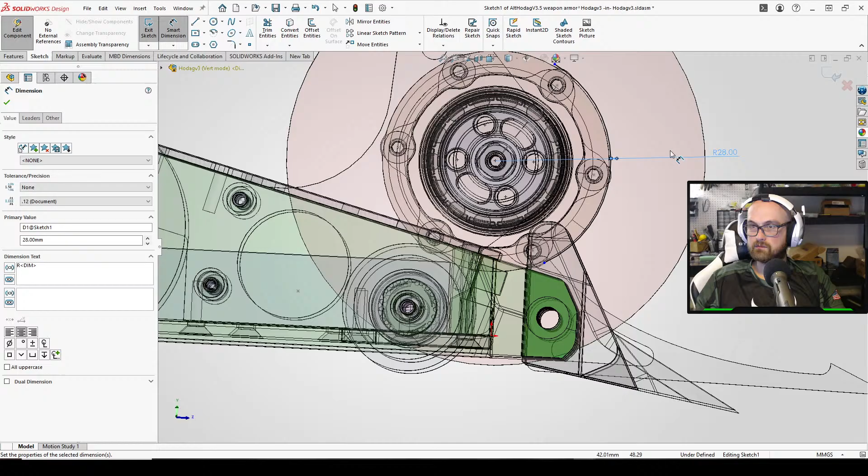We're going to do 30. We'll just- even 30? No, is that too big? It's a little big. I don't want to, like... 28, maybe?

And then I think we'll have something perpendicular to the- I don't even know what we're calling this plane. Perpendicular to this little plane here.

I'm going to do it using the, whatever it's called. Stop picking random points. We'll do- no, we'll do parallel, and we'll make it like a millimeter up.

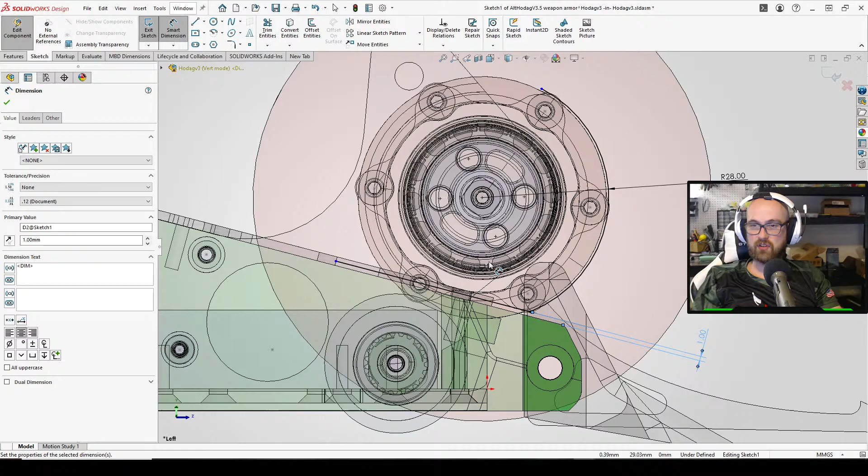I'm not sure if this is going to end up- it might end up being a separate robot. It's definitely not- I'm not giving up on the punch spinner anytime soon. But running the punch spinner is expensive whenever it breaks because the slide assembly is so expensive. But the bones of it and the structure of it lends itself really well to a vertical spinner already, because it basically is a vertical spinner. So that is the thought process there, basically.

Okay, we're actually gonna do- we're just gonna make this tangent to that. I think that's how that's gonna work out, and that's gonna give us good shape, I think.

And I think we're gonna start out with thin- not that- that's not... We want this to literally be just enough to keep it mounted. 2 millimeters, no, that should be enough material. We just want enough material that it's not gonna rip off easily with like 4 screws.

Oh, that's not gonna work. There, we have a fork there.

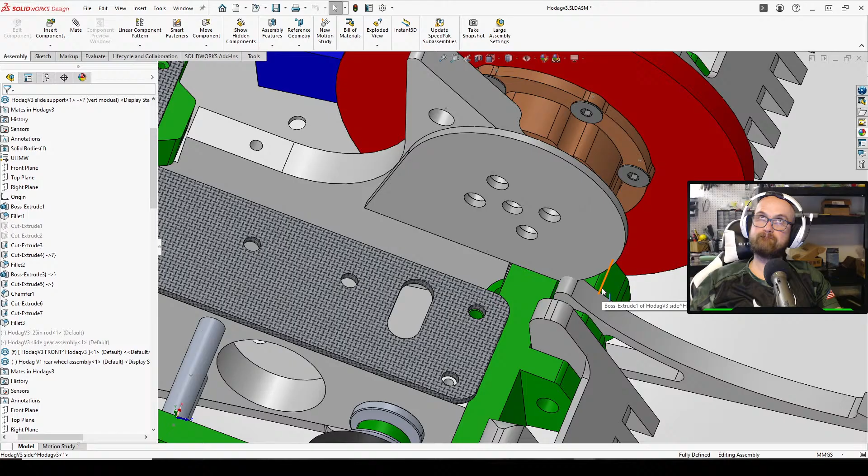I was like thinking about- let me see something. No, I think that's basically the highest thing we get. Right? Let me check. No, not. I'm realizing this might not necessarily work with everything. Yeah, that's not. Yeah, the other one was probably better.

Okay, so we want to make a cut so that we can actually fit that on there.

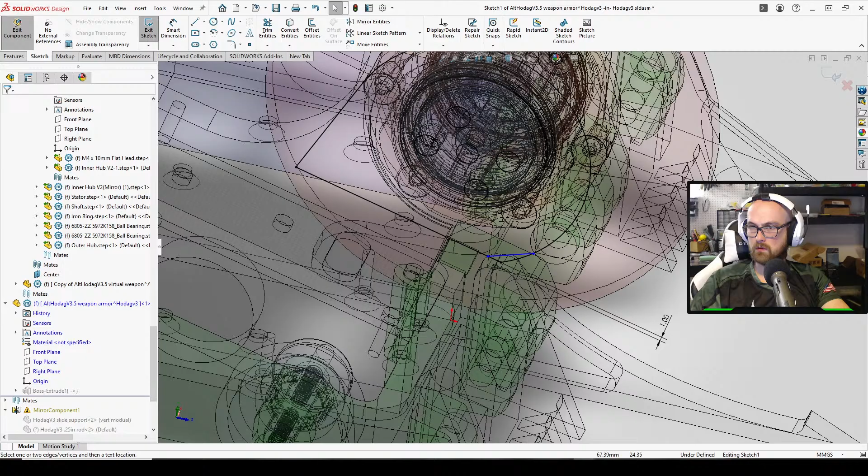But yeah, I think we want the- now I got some goofiness going on, because I know whatever I do, it's gonna break something.

Well, I think we went in the right direction, just not far enough. A weird way to do this. Okay. No, I don't. Well, now that's too much of an angle.

Because we want to keep as much of this material. That should be good enough. No, I don't like that. I think 30 was it. I think I was on to something when I did 30.

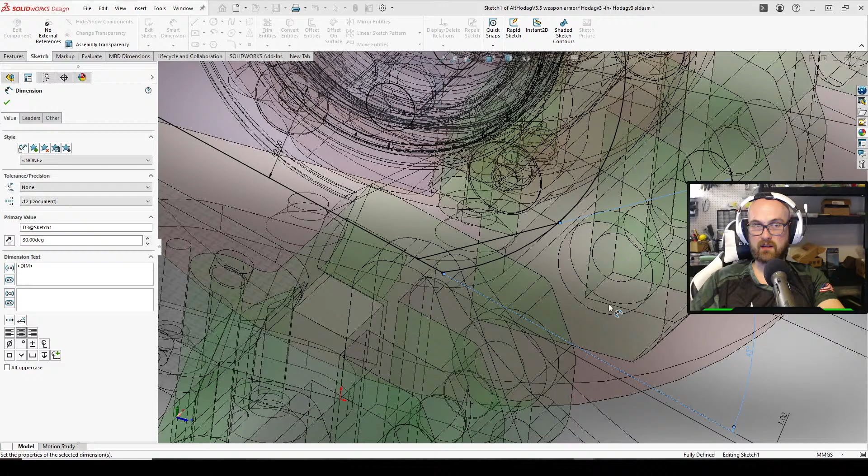Yeah, skunk. This is basically what I did with Bigfoot, except I don't know about this. Although I think this will lend well. There'll definitely be a less weight difference. I don't think getting this in weight will be very difficult.

Okay, not gonna. Okay, it's not angry at me. We're not running into our own forks.

I realized if I'm just doing this connected to the screws, or like where the screws are, I don't need - what am I saying - I don't need it to go back that far. This feels silly.

Honestly, I think I'll get rid of that and just have this go onto the bottom. Just do a bit of that. Simplify the shape too. Not that, yeah. We may end up changing it a little bit more, but we'll see.

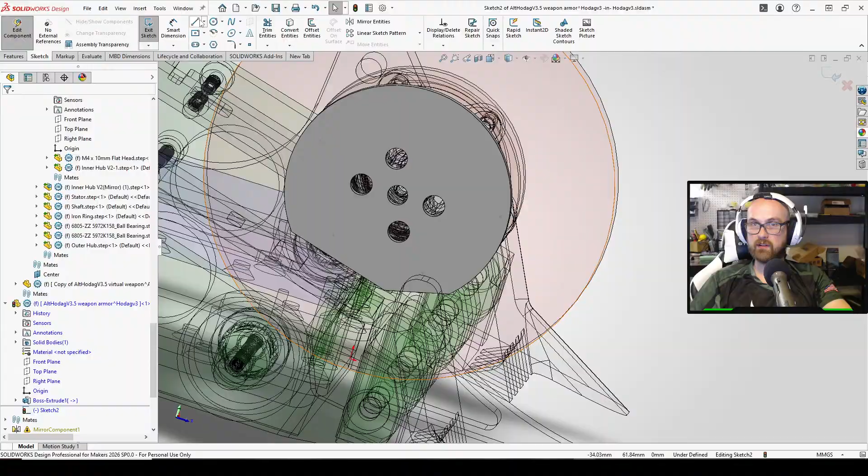Then what we want to do - sorry, I forgot exactly what. Okay, I know what I want to do. Okay, I was just trying to think of the - I want to like - okay.

This is definitely not the way I'd recommend doing this. I've completely forgotten the best way to do this as I'm doing it.

We'll try offsetting entities. I know. Probably the dumbest way to do this, but I do things in the weirdest way.

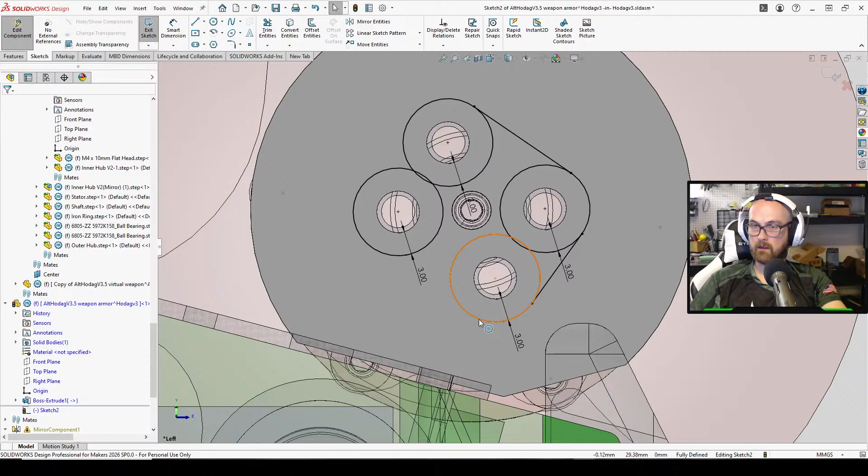This is a goddamn joke. My life. The worst way to do it. I'm like, what am I doing? People are watching me. Embarrassing myself.

Oh, this is gonna - now we do. Not the best way to do it. I would not recommend doing it that way, but it is one of the ways to do it, and it's the way we just ended up doing.

I'm also realizing now that we probably want to go further. Further, I don't know. Enough that this looks right, then we offset enough that it actually acts as armor.

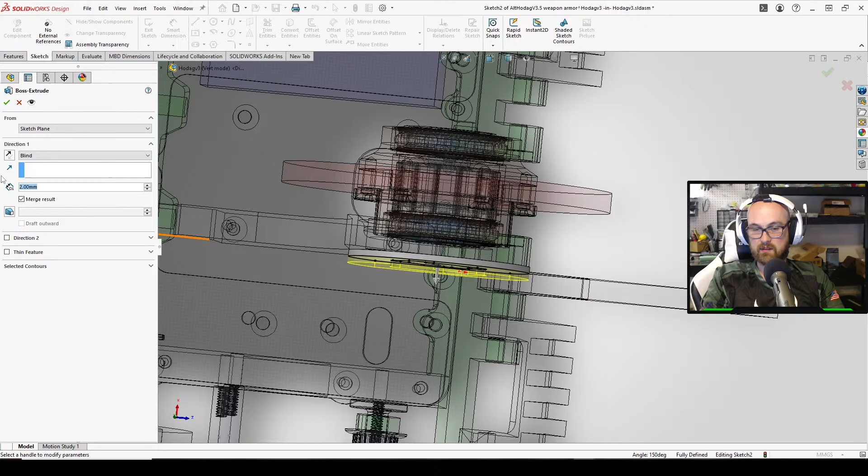Why am I doing this? Why am I turning Hodag into a vert? I don't know. So I just - so I can have a version of Hodag that I can drive around.

I'm not getting rid of the punch spinner. The punch spinner is not terribly competitive, and that's a big part of why I want something else to have, unless the punch spinner starts suddenly being much more competitive.

But yeah, I'm definitely, when I go to NHRL in, I'm hoping, April, I'm still gonna be bringing the Hodag as a punch spinner. I don't know if I'll also have this in my pocket, but that depends on what the weights end up being.

Big. Oh, the 26 - that's pretty. Okay.

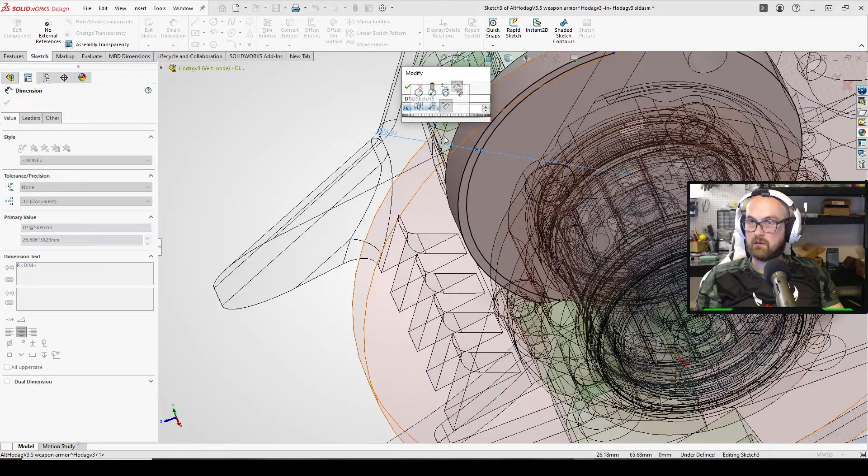I don't know what you're mating this to. But yeah, I mostly want options, because I can't run a punch spinner at every single event.

As much as that would be nice to. Because yeah, I'm certainly not going to get rid of it - it's not like we're gonna cease to exist.

Okay, what we want to do. Yeah, it's definitely - this isn't the death of Hodag as you know it.

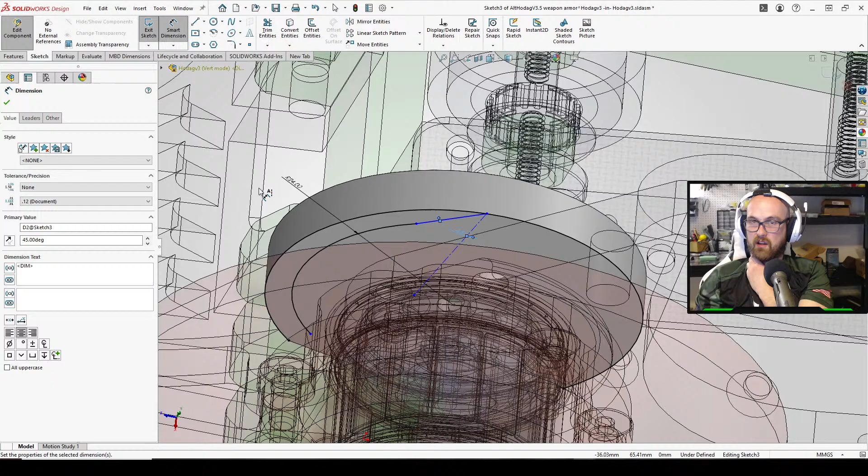If anything, this is going to allow me to make changes to the other parts of Hodag without having to run something that's tripping. I can run Hodag without having to always have the punch spinner.

But we'll see how it ends up working in practice, because I know in theory it's going to work one way, but in practice it may not.

I think, oh, I think I just want this going vertically down.

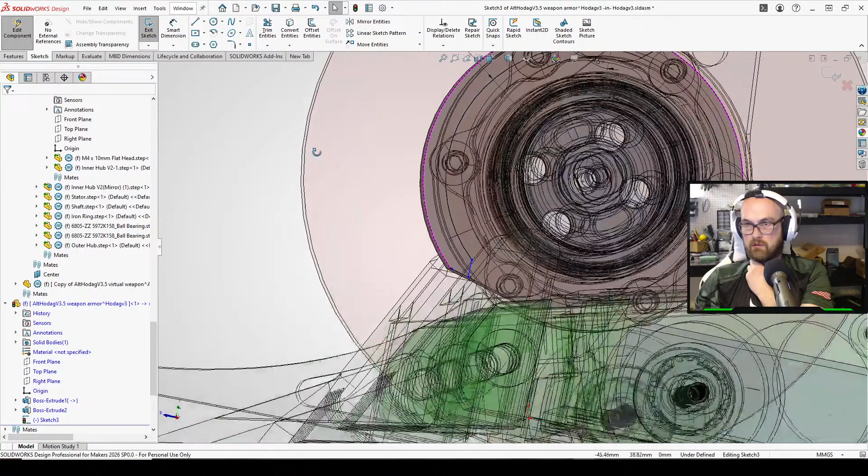Yeah, we're gonna be - part of me wants to run this as its own robot, but I'm not sure how much I'll be able to get away with that. I'll have to, but so it's gonna.

I haven't actually weighed the weapon assembly on Hodag on its own, but if the weapon assembly is less than half the weight of the robot, I won't really be able to run it at MRC events, which is basically all of the events I go to. That might be an issue.